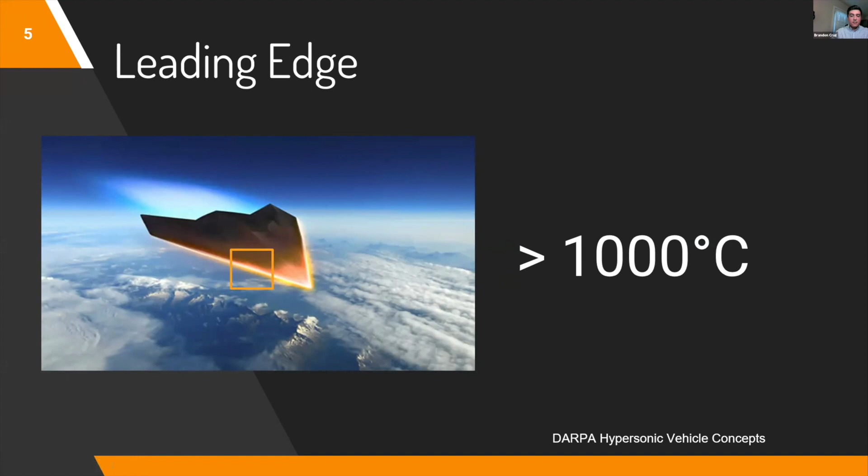In many cases, it's like 3,000 degrees Celsius, which is pretty common for a hypersonic vehicle. This problem, where the leading edge is glowing red hot, experiencing a lot of wear and thermally induced stresses, is so characteristic of the vehicle that they're always shown glowing red hot this way. And that's actually accurate, and it's indicative of one of the biggest issues in growing that technology and accommodating those loads: the heating there, because a failure at the leading edge is a mission critical failure that can cause the airplane to lose control or actually just explode, and has definitely happened for the vehicle in the top right specifically.

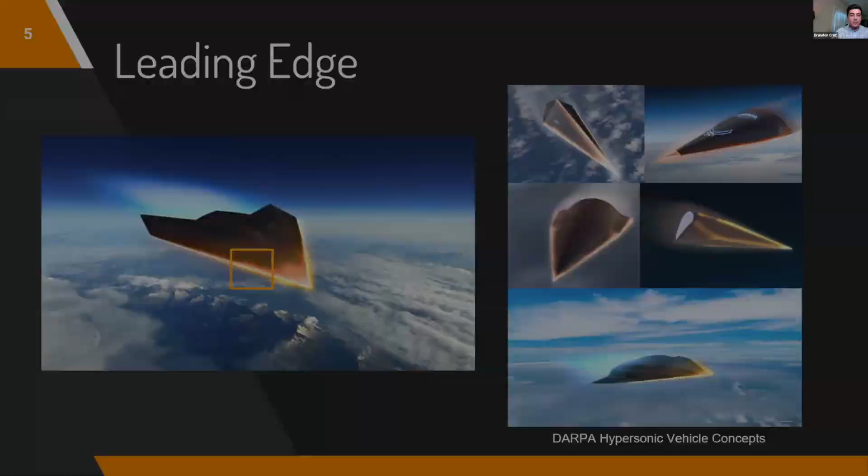And this has to do with the speeds. The Mach number is a speed, right? So Mach 1 is 1 time the speed of sound, and Mach 10 would be 10 times the speed of sound. The higher you go up in Mach number, the more heat the leading edge experiences and the more thermal loads you have to accommodate. So this problem becomes very large at high Mach numbers.

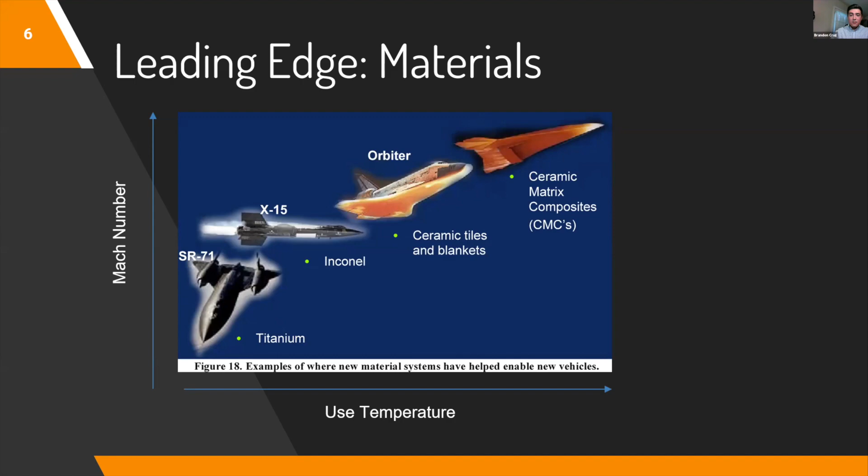What's actually happening here is that the airplane is going so fast that the air molecules interact with the shock wave of the hypersonic vehicle, and that's a chemical reaction that provides a lot of heat to the leading edge. So the faster you go, the more intense that becomes.

One of the ways they want to try and accommodate these thermal loads is by creating an internal structure in the leading edge that could run fluids through it and potentially take some of the thermal loading right at the tip, where the convective heating is highest, and move it back to other places in the wing where the heat can be radiated away.

So if you can accelerate this process, you can reduce the temperature at the leading edge, which can either let your vehicle go faster, last longer, or require less maintenance.

And potentially, if you were to use a working fluid that is the vehicle's own fuel, you could get an efficiency benefit from heating the vehicle's fuel through using the aerodynamic and aerothermal heating at the leading edge. And so that was the primary motivation for the research.

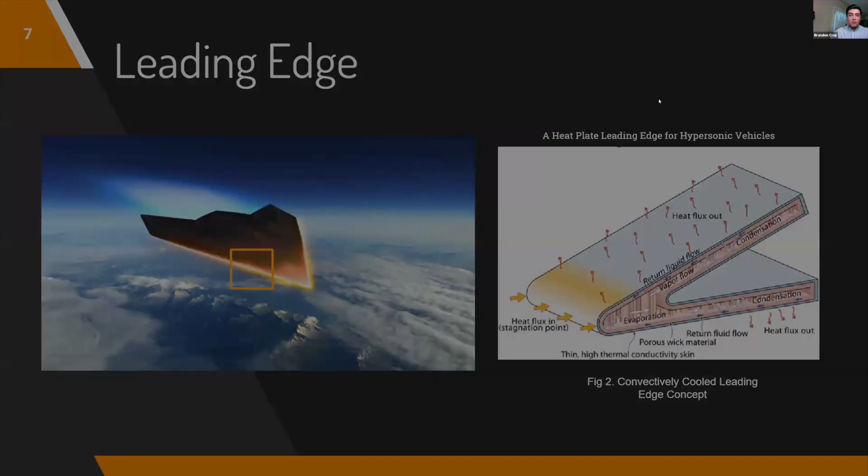And for such a complex problem, these simple geometries may not be sufficient to accommodate the thermal loading at the leading edge. So my research aimed to combine this problem with high temperature metal additive manufacturing.

Over at Center for Electromechanics, we have this LENS machine that can print metals and polymers, as well as high temperature ceramics. As we can see, the manufacturing capabilities of additive manufacturing open up many doors for different geometries. You're no longer restricted to the simple shapes or processes with heat pipes that we were before — we can create almost any geometry.

It's like including lattice structures, like on the right side. If we combine this kind of geometric freedom and try to use it to address the aerothermal heating problem on leading edges, we could potentially come up with a more effective geometry that wouldn't have been possible before, but with today's technology, could enable cheaper, reusable hypersonic vehicles, especially ones that use air-breathing engines — so not orbital reentry vehicles, but atmosphere-to-atmosphere vehicles or space planes.

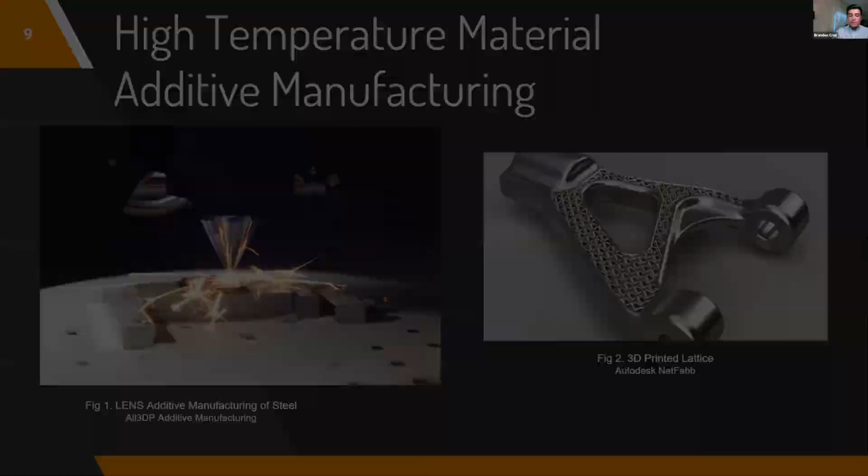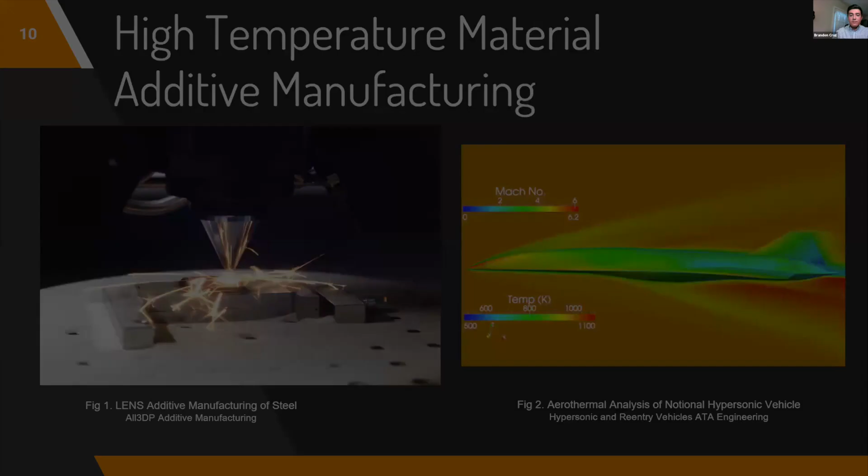So my research this summer was combining that science with additive manufacturing techniques to create a model for a next generation hypersonic vehicle leading edge that has cooling channels in it. The same way as the image before, we'd get some heat here at the leading edge and it might be taken back to these channels.

This part here was printed on an SLA machine at UT Austin. Fluid would come in through the center and go through the front, facilitating heat transfer away from the leading edge to other parts of the vehicle, like back here, where it can be radiated away. This should reduce the temperature of the leading edge significantly enough that lower temperature materials could be used, things like high temperature metals as opposed to ceramics or carbon composites, which, like Brian was saying earlier, there's a big motivation to do considering the advantages of using metals on these vehicles.

So here's some more pictures of that leading edge geometry, and just a concept of what this could look like in the metal. There's a lot of different places, a bunch of different angles you can take this problem at.

We looked at material science and the aerothermal and aerodynamic conditions. Like Brian was talking about, there are so many different ways to approach this problem. It's very interesting to research and learn about. Getting on this project was very interesting and a lot of fun, and just learning how those decisions are made by engineers was fascinating, something I want to continue working on. So I'm very happy to present my research today for National Manufacturing Day.

You have to consider all these material properties as well, so it's sort of this huge problem. The more you look into it, there's more variables. Things like the 3D printer itself changes material properties of the metal, and you have to account for all of that as you're doing your design and qualifying the part for production.

So that was my research over this summer on additive manufacturing on liquid cooled hypersonic vehicle leading edges. At this point, I'd like to ask for any questions, if any.

I just want to add a comment based on what Brandon just presented. Brandon did a great job this summer as a summer intern student working with Dr. Beeman and me. I'm pretty sure we're going to organize tours either in October or November. At UTRGV, we have two metal machines. Brandon mentioned in his presentation, right? We have machines that can handle high temperature metal materials.

So hopefully, when you come on campus, you're going to get a kind of taste of what this kind of additive manufacturing process looks like, the principle of these processes, and especially for metal printing, it's a challenge in terms of technical integration, maintenance, everything is different from like the 3D printer you have at your school or at your home. So those machines, you're talking about a $1 million machine, because of the technology involved. But anyway, you guys ask questions. I just want to add some comments here.

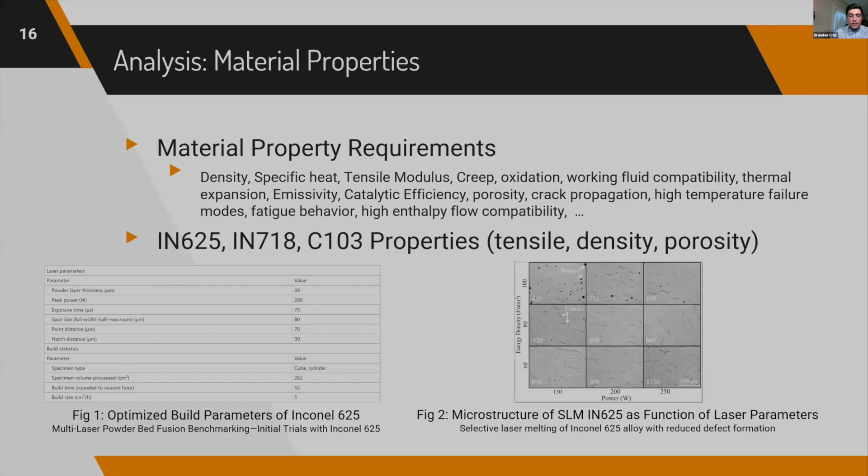I don't remember the number off the top of my head, but there was a picture of a convectively cooled leading edge in this NASA technical report. That one listed the temperature difference they achieved with this convectively cooled leading edge. I don't remember exactly what the number would be, but it's significant enough that lower temperature materials could be used. So if you're in a situation where you might have to switch from a carbon composite to a metal material, the benefit of cooling the leading edge with convectively cooled liquid or a passive cooled platelet heat pipe leading edge could be significant enough that you can use lower temperature materials. I imagine that's enough to lower the IR signature somewhat, but I don't know if lower is just better, or if there's a certain threshold where being below that is advantageous.

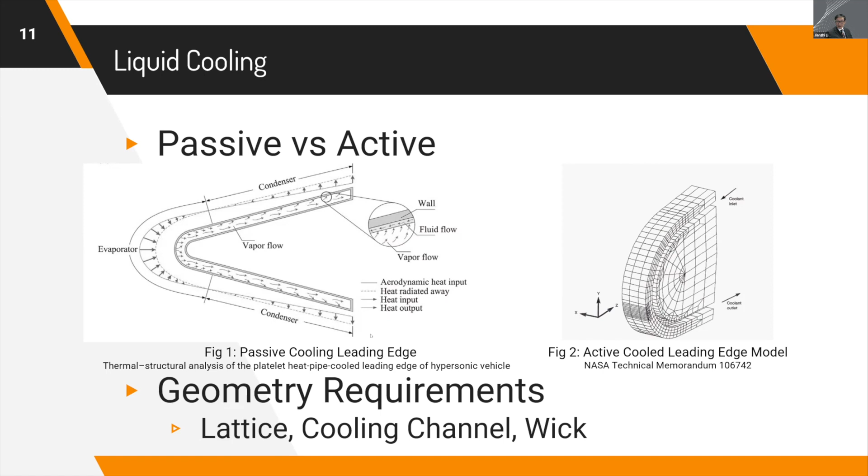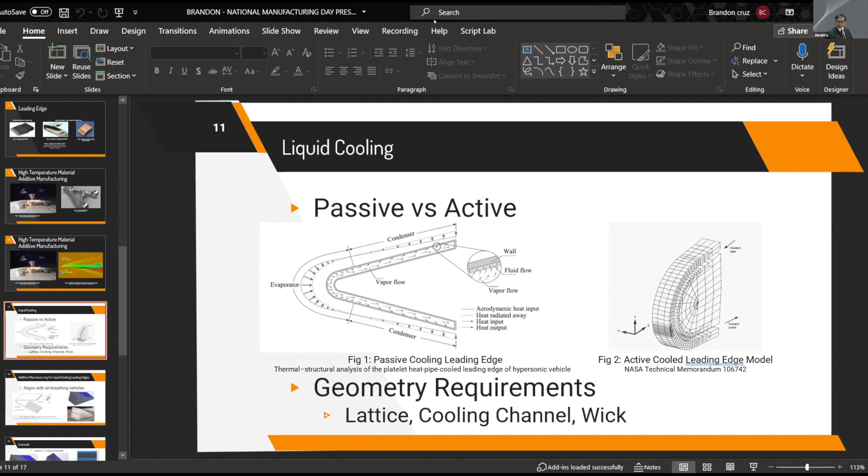Please go ahead, Leslie. Hi everybody, my name is Leslie de la Llama, and I've been working with the iDream4D consortium this summer, and I'm very excited to be here today to share a little bit about what I've been working on and some of the projects that we got to participate in.

So today I'm going to be presenting on bioprinting using the LIFT process, basically preparation and printing of bioinks for biomaterial applications. This was a very exciting project to work on, and I know it sounds a little overwhelming at first, but I'm going to try and break this down as best as possible.

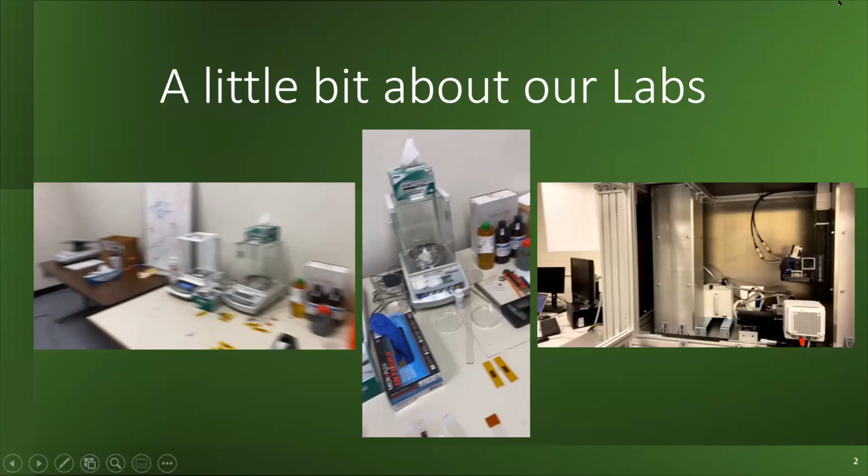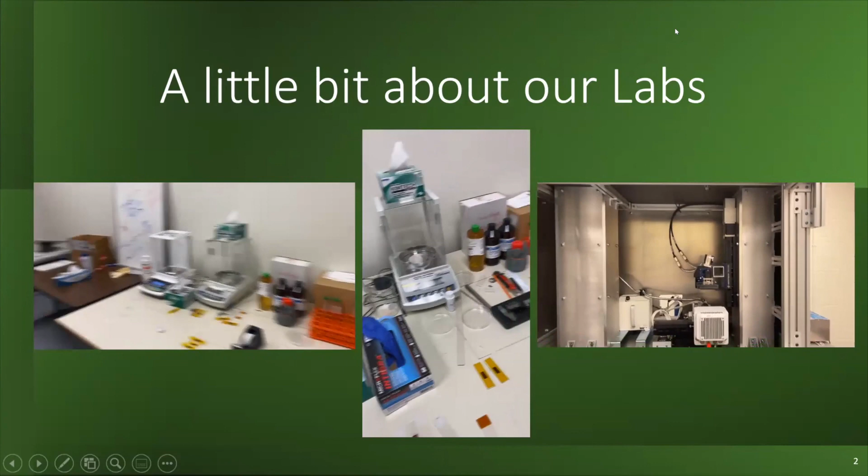So this is a little bit about our labs. I wanted to share what our labs look like, some of the areas in which I have worked. This is our laser printing lab at the Texas Manufacturing Assistance Center at UTRGV. You can see the laser printer we worked on, the preparation of the slides for printing, and a close-up of our workspace. On the right side picture, you can see our laser printer, and on the left side, a preparation of one of the actual slides up close.

So what is LIFT? LIFT stands for laser induced forward transfer, a laser printing technique that prints small droplets of any desired material. In this case, I've been working with collagen type 1 and graphene inks, but there are a multitude of different materials you can use for this process.

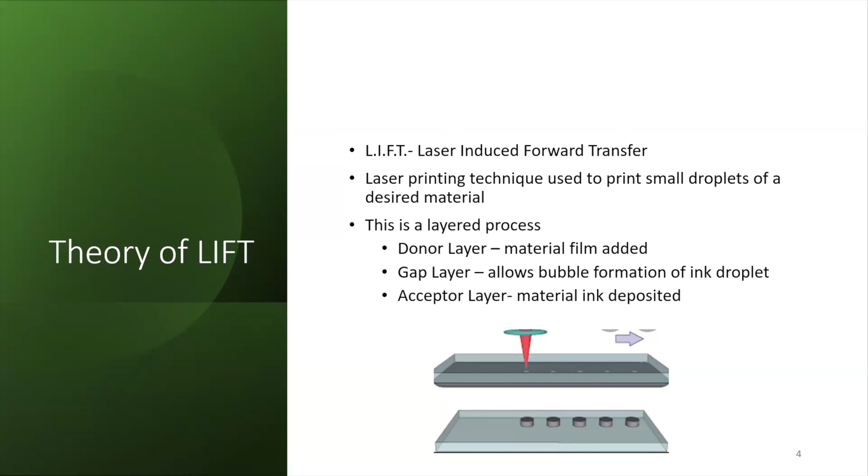It's important to note that this is a layered process. This includes a donor layer, a gap layer, and an acceptor layer. I'll be able to explain a little bit about that on the next slide.

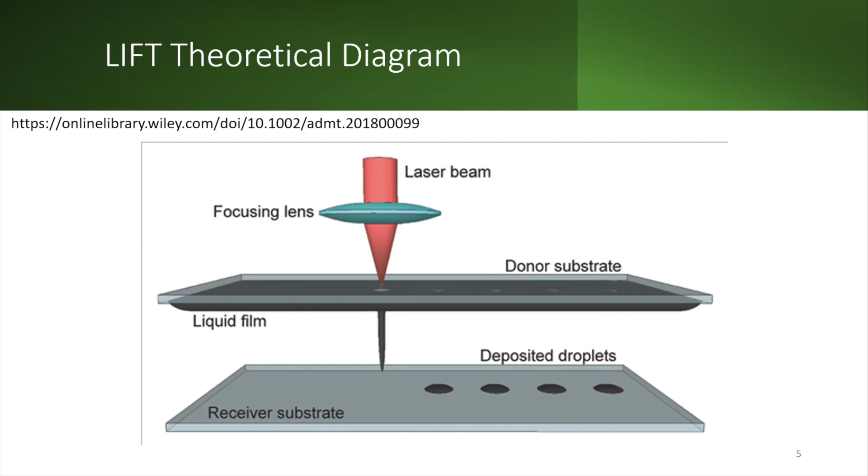So that laser will focus on the liquid film of material ink, and it will create an air gap. That air gap will expand into a bubble, and once that bubble has enough air in it, it will deposit onto a receiver substrate, also called an acceptor slide. That little gap between the donor substrate and the receiver substrate is essential so that the droplets can have enough space to deposit properly, so we can get the most desired droplet size or formation for whatever printing application we need.

So some of the applications of LIFT, as I've mentioned, I've been working with biomaterials, so there are plenty of opportunities in the biomaterials section. I've also been able to work with sensors and electronics, basically different printing patterns of conductive materials that can be used for sensor applications or for microelectronics, wearable electronics, or flexible electronics.

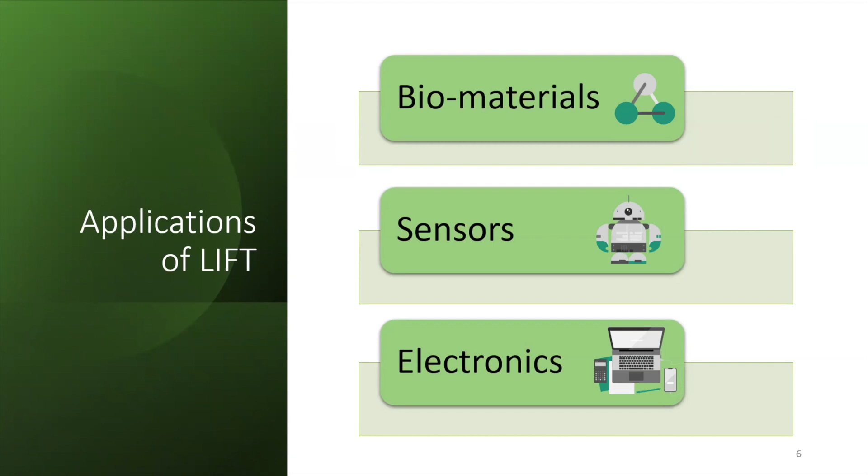And there, like I said, definitely a lot of applications. So this is not a limited process at all. These are just some of the areas that I've had the privilege of working in.

This is about my research topic. This summer, I was able to create a research question, and that was: I wanted to find out the effects of process parameters on droplet formation of graphene and collagen inks for biomaterial applications. So what that means is I wanted to see which programming, which kind of adjustments I needed to make to the laser printing process, or how I needed to program the laser, which pulse energies needed to be used to ensure the most accurate droplet formation for the applications we were searching for.

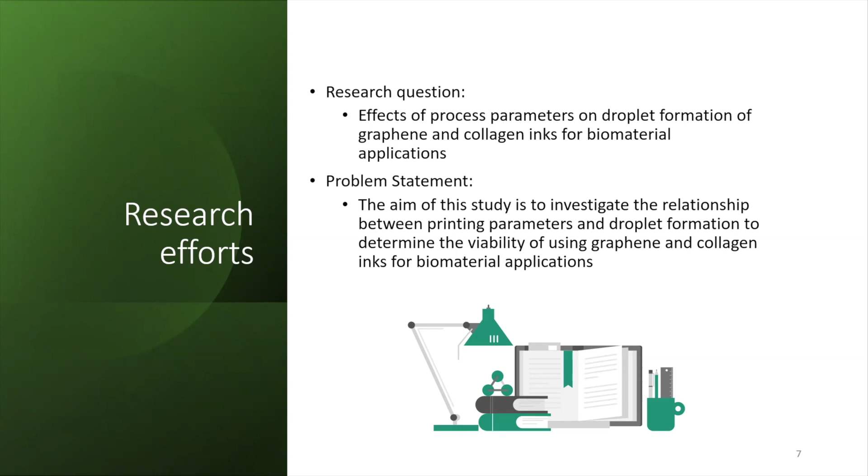Basically, I wanted to investigate the relationship between the printing parameters of the laser printer and the end droplet formation, and then see in what areas I could better use these results for bioprinting.

So this is a little bit about the project contributions. I know that engineering is most definitely a team effort, but these are some of the areas that I was able to work in when I was doing my research.

I was able to prepare the microscope slides, as you can see at the top. That yellow tape is called Kapton tape, and that's necessary for the preparation of the slides. As you can see, I've coated the slide with that material ink, and that is also very essential.

I needed to check a specific width, a specific concentration of material to be sure we could get the most accurate printing. That's what that kind of looks like, and I'll explain a little more step by step in one of the next slides. So that was the manual coating of the slides.

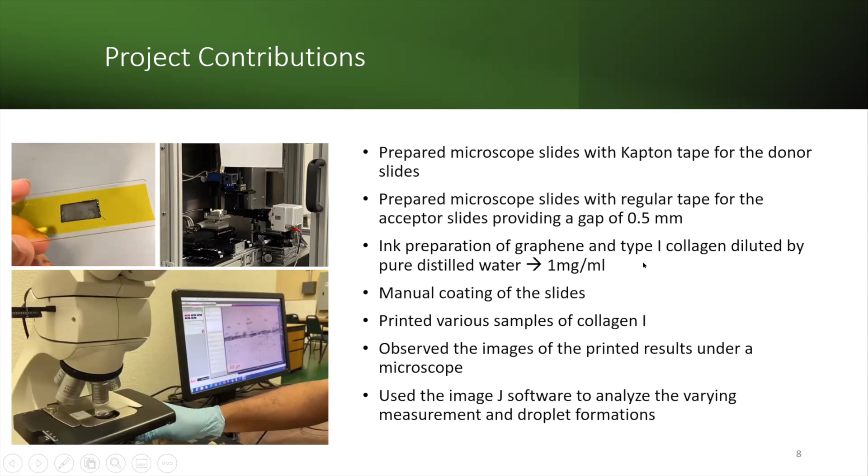Then we also got to print various samples of collagen type 1. As you can see in the video at the bottom, we observed some of these results under a microscope so we could see the droplet formation, the droplet size, the widths, the diameters. We measured that using specific computer software because these droplets are so tiny they definitely need a microscope to be seen properly. So we worked on that this summer as well.

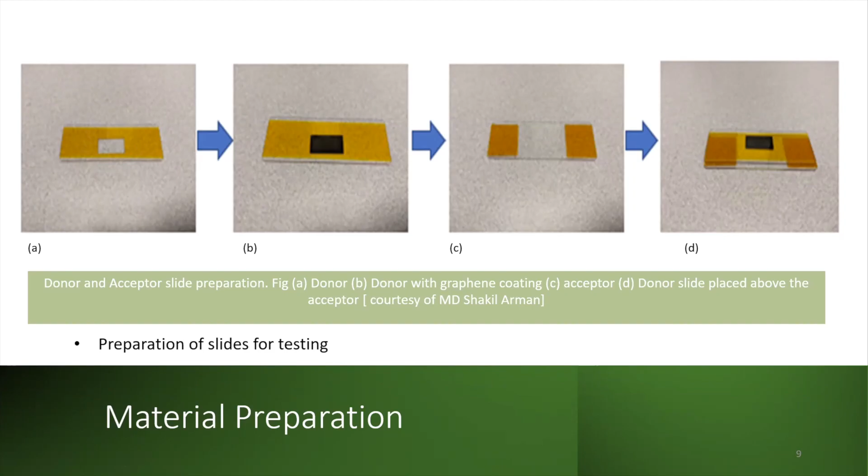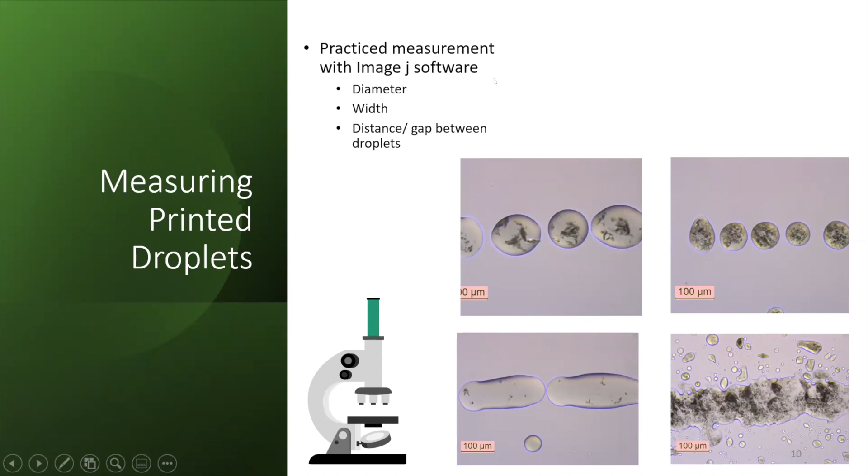That's why we had to test these over and over again to ensure the most accurate print for our parameters. This was also a research-based project, so I definitely had to read a lot of articles and do a lot of independent research as well as team research.

Anyone wanted to add anything?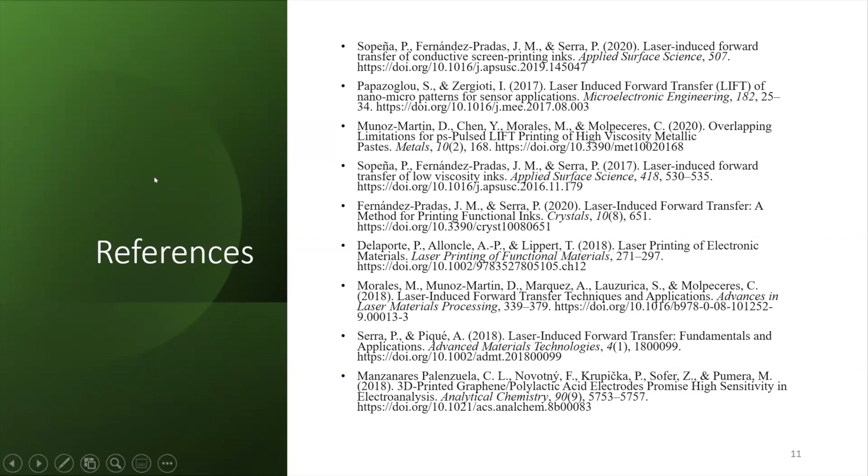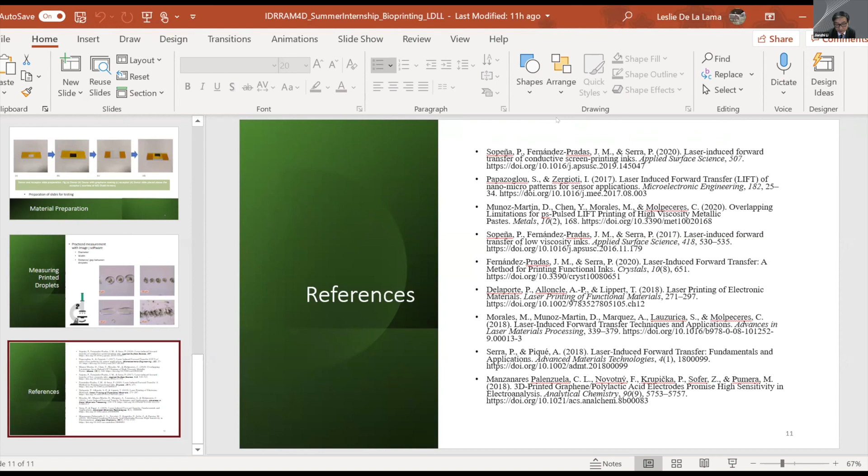For Leslie's work, we actually have a few graduate students working on this project as well. And this machine, this setup, we're going to have a tour around after 12 o'clock. We do have some other projects supported by this machine. I think we have a bunch of graduate and undergraduate students working on this setup for different applications, and this is just part of the projects we're working on. This machine can also do laser grinding, for example, laser material removal. Lots of capabilities, so maybe in the future when you come to our campus we can also show you this piece of equipment.

Dr. Shenshen? Yes. So thank you, Leslie, and thank you, Brandon, for the student section.